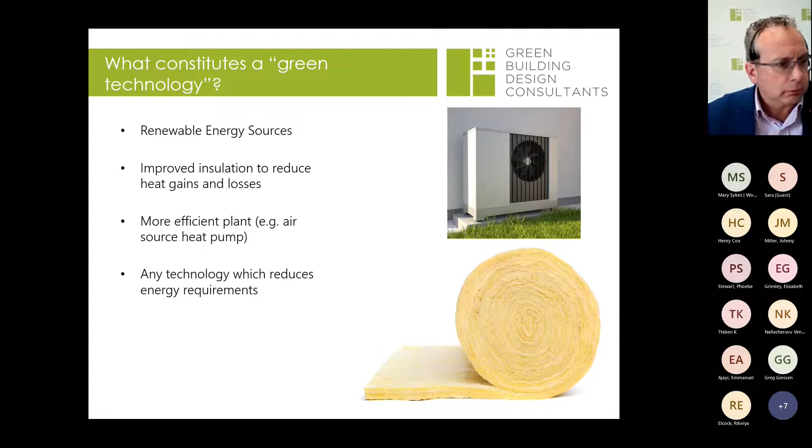Sorry, I'm having a bit of a problem with the slides here today. I don't know what's going on. Right, here we are. Sorry about that.

So that's really where the efficiencies lie, in the technology of the machines. Now, in terms of their level of efficiency, it is often referred to as a COP. Now, that is defined as a coefficient of performance. And that really is the manufacturers giving you, during an exact set of conditions, an exact external temperature and an exact internal temperature, how efficiently the machine can produce that.

And you'll typically see that as a number anywhere between 2.5 and about 6 on a specific set of conditions, which obviously isn't that helpful when you're trying to select a machine, because every day there's a different temperature, during the day there are different temperatures, and you may want different temperatures internally. So what the manufacturers try to do is take an average over the whole year, and they call that the SCOP, the seasonal coefficient of performance.

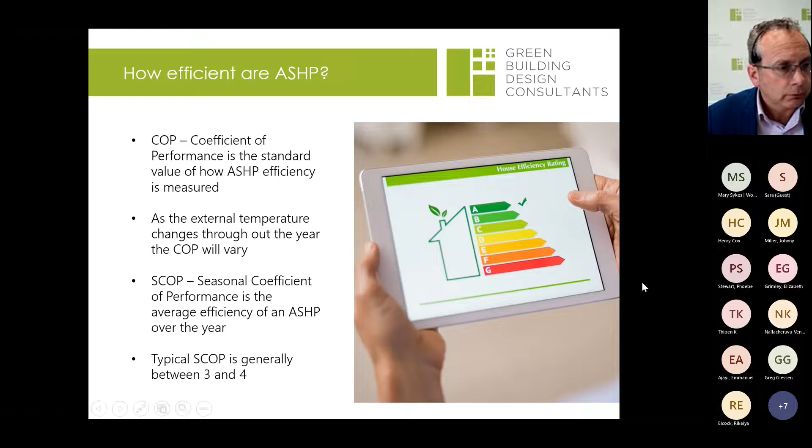Controls is one of the biggest ones that we could look to do. And obviously changing all of our lights to LED lamps. LED lamps use a fraction of the energy of GLS tungsten lamps, can be down as low as 10%, and probably about 30% of fluorescent lamps. Controls that automatically switch off the heating, lighting, and other services. Obviously, insulation we talked about is clearly going to save energy.

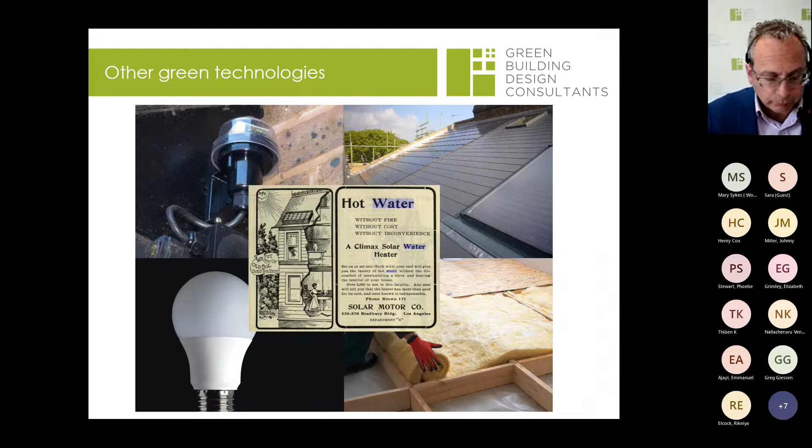Now, obviously, when we talk about green energy, we tend to think this is a new development and has not been around for very long. But there's a couple of slides there. Look, the one in the middle, from 1902, was a primitive solar water heating system, which comprised a cast iron tank and a wooden box, which gave you a free tank of hot water each day, demonstrating that this has been around for over a century. And in fact, the first solar powered station was built in Egypt by the British in 1912, and that was providing electricity to pump water from the Nile into local cotton fields.

So, challenges with green. This is always the problem. Probably one of the biggest challenges we have is the upfront costs. Going green is going to cost you more than staying with your boiler. Now, the costs for using green technology, if it's properly designed and properly laid out, will provide paybacks. Some of those systems can give you a payback in 18 months, and some of them can extend towards 20 years. But I will tell you now, the one thing that doesn't really pay back is an air source heat pump compared to gas boilers.

Now, you can get various grants from the government, and you can look at those, and those will obviously assist and help on those paybacks. But if you have a salesman telling you that he can put an air source heat pump in, take the gas boiler out, and pay it back in a couple of years, he's probably stretching the truth a little bit. And basically, air source heat pumps are going to be the preferred choice of the government. There will be some grants around for it.

And the days of having cheap gas heating, I'm afraid, for most of us are unfortunately going to be disappearing, a memory of how it didn't used to cost much to heat our houses, and now it does cost more, and it costs more to put that equipment in. And that's the reality.

The other constraint we need to think about with air source heat pumps is the size of the plant. We need a large unit outside, and we also need a unit inside, and potentially we need some air handling plant to control the amount of fresh air coming in. So the space that the plant needs is much more than we've been used to.

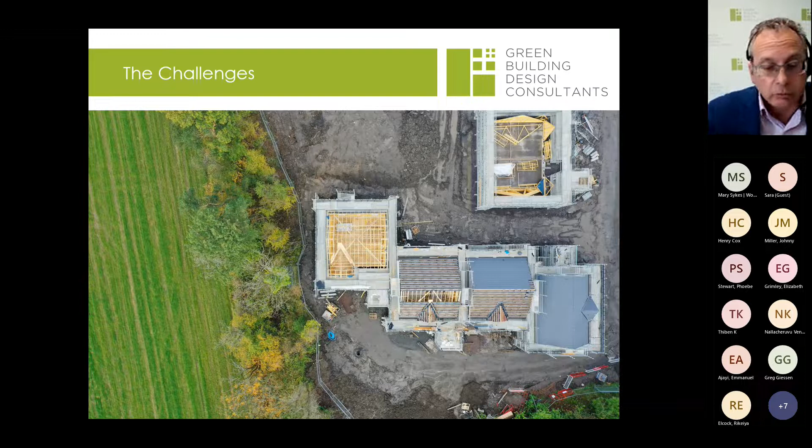Retrofitting these into existing houses does have some challenges, mainly because boilers work at higher temperatures than the air source heat pumps. That does become a challenge and needs to be properly designed. The biggest challenge when you have an air source heat pump, I think, or a ground source heat pump, is when people talk about the costs.

Now, we have already talked about the SCOP, which is your seasonal coefficient of performance for heating. There is another term that gets used, and that's the SEER. I don't know why we keep having all these names, but engineers are good at that. And that stands for the seasonal energy efficiency ratio. And that's the term used for cooling. So if you're going to cool your house, you'd look for your COP or SCOP for winter, and then you look for your SEER for how it can cool your house or your office in the summer.

Now, let's take the cost of electrical energy. It's very topical at the moment. Compare that to the cost of gas. With them constantly changing and fluctuating, it's difficult, and you have to draw a line in the sand at a date and look at that number. But typically, electrical energy is about 2.5 to 3 times more expensive compared to gas. So what that really means is you must select a machine that has at least a COP of 3 to 1, because if it doesn't, it could be costing you more to run than a gas boiler. And all the time it's running above that COP, it's saving you money towards the capital cost.

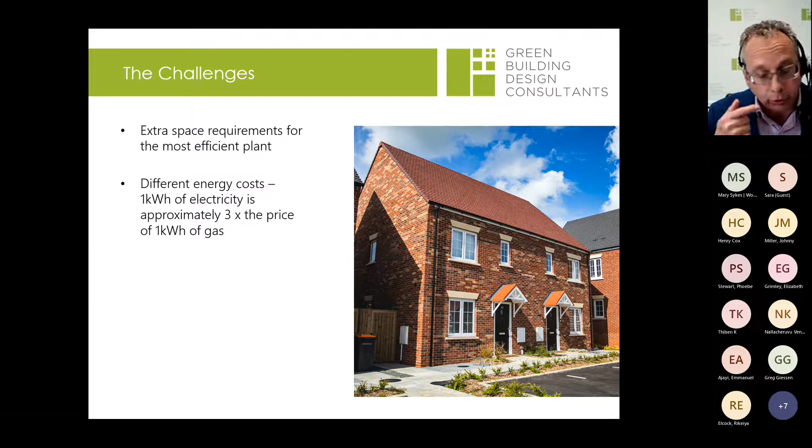So if we take an average machine with a COP of 3.9, that means for every 1 kilowatt of electrical energy in, you're going to get 3.9 kilowatts of heating or cooling into your space. Then compare that to how a typical air source heat pump would have an SEER, the cooling ability, of sometimes between 7 and 10 to 1. So again, that's amazing. 1 kilowatt of electrical energy in, and you're getting 10 kilowatts of cooling to your space. So back to heating.

The COP is for a specific temperature outside against a specific internal temperature. When coming into cold weather outside, they're obviously not quite as efficient. I guess that makes perfectly good sense. When it's really cold outside and you're trying to extract latent heat from the air, it's more difficult than if it's at 25 degrees. So manufacturers such as Mitsubishi quote that at -7 outside, the COP is about 3 to 1. So depending on exactly what you are paying for gas and electricity, it might at that specific moment cost you more to run than a gas boiler.

At -3, it jumps up to 3.4. At +1, it's about 3.9. And at about 25, so in the summer when you've only got hot water loads, manufacturers seem to be suggesting it's about 5. So if you use a lot of hot water in the summer, then you are going to save a lot of money compared to your gas boiler and help start to repay that extra cost.

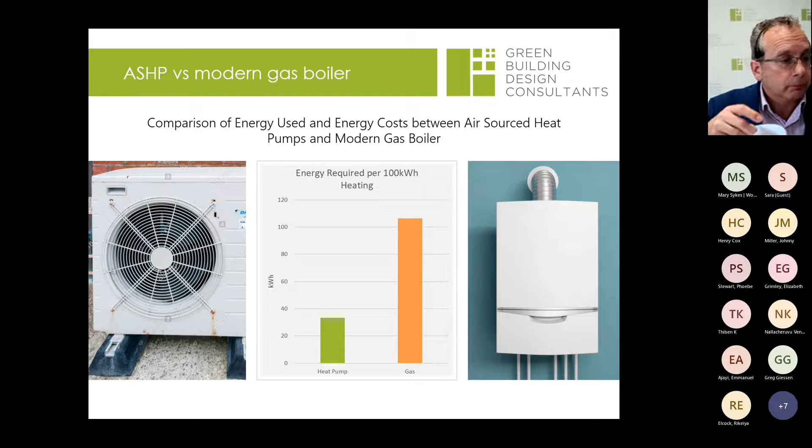So if I take Green Building Design's offices as of the 1st of April, we are unfortunately having to pay 28.4p for a kilowatt hour of electricity against 8.8p for a kilowatt hour of gas. So this second graph now on the right hand side is now showing how that can work on costs. Now, running through the maths,

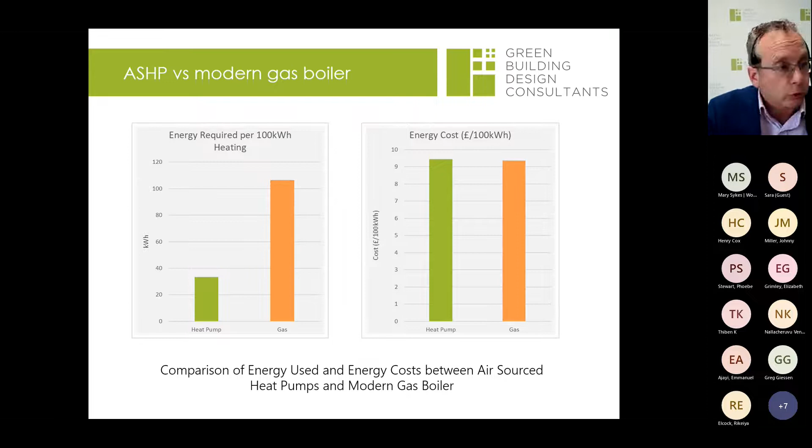if we assume that the COP of the machine was 3.1 in the winter, and therefore for every kilowatt of electrical energy in, you're getting 3.1 kilowatts to your space, so you're getting good efficiencies. Times that then by 100 kilowatt hours, that's coming out at £9.46. Then if you compare that to a typical gas boiler with a 94% efficiency, it's coming out at £9.36. So that's actually 10p cheaper to run those 100 kilowatts in that condition of internal temperature against external temperature, which clearly is quite a shock to some people, including engineers.

Now, having highlighted that maybe the air source heat pump isn't as grand and grandiose as I'm saying it is, clearly it's going to save an awful lot of carbon. It's going to save at least a third of carbon, and it may be down to 20% in the summer. So from that point of view, from carbon, there is great savings. What can we do to make the air source heat pump work better?

So in a domestic house, we've got to look at the thermal insulation. And if it's a new house, then clearly it can be built very well. And if it's an existing house, we can look to add insulation internally, change the windows to double glazed, stop air infiltration leaking in through drafty doors and windows, and add insulation obviously to the roof.

We could also look at your hot water demand. Now, hot water on air source heat pumps takes a while to heat up. It uses air source, it uses latent heat, and it will need to typically charge into a hot water tank. So we need to be really careful how we size that tank, because what we really need to ensure is that in the afternoon the hot water is charged up using the air source heat pump, hopefully in the south or west facades where you're getting solar radiation and the warmest weather. And then that tank then supplies your water load all day.

So we really need to start very carefully matching and make sure you're putting in low water use showers, typically what you'd get in a Premier Inn, which gives you a nice hot pressurized shower. And things like rainwater showers, which are very pleasant and nice, you have to understand they use an awful lot of hot water. Now, if the system hasn't been designed for that, then the chances are you're going to drain that tank of hot water down.

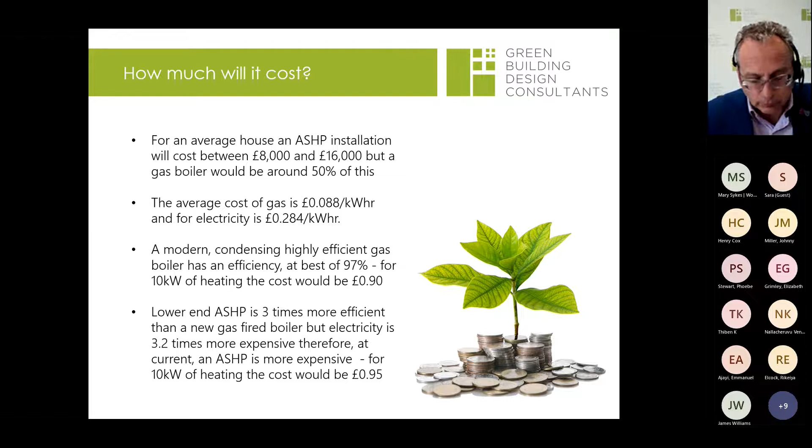So I wanted just to bring this slide in as it's much more topical, not knowing exactly who's in the audience, but just think about the costs. I'm asked all the time, okay, I haven't got 15 grand to put an air source heat pump in, but what can I do to save energy? And then when you have a chat to people, they do silly things.

In my house, I'm constantly having a row with my wife, because if we have a cup of tea, she'll fill the kettle up to the top, heat the whole kettle of water up, pour out 1 or 2 cups, and a couple of hours later get another cup of tea and fill it up again. Now, it's difficult to know as there are millions of kettles on the market, but looking at the kettle in our office and measuring the time it takes to take tap water up to boil, we've estimated that costs 10p at current rates in our office at 28.4p a kilowatt hour.

Now, that may not sound like much to you, but how many cups of tea a day do you have at home when you're working at home now? 10, a pound a day, times 365. So you could easily be spending £300 to £400 a year on boiling kettles of water for cups of tea. Now, if that was 25% full for your 2 cups of hot water, it drops down to 25% of the costs. So potentially, by only filling the kettle proportionally to what you want, you could save £250 a year in that scenario.

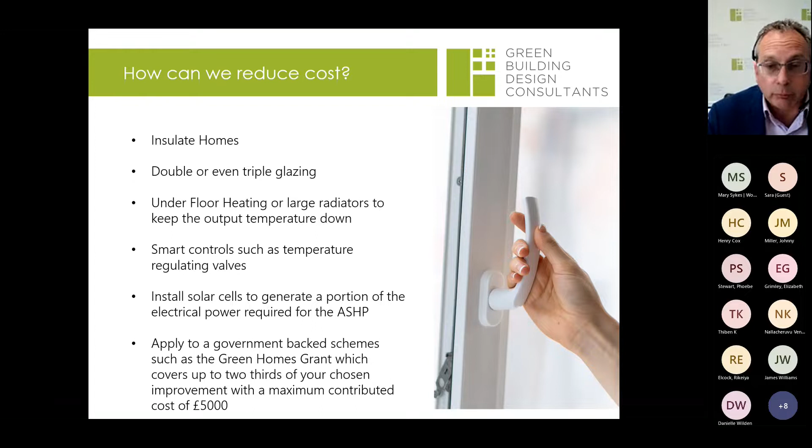So PV, in my opinion, every house in this country should have PV on it if you've got a south or west facing roof that is not shaded by trees or other buildings.

What we've done here is we've done a little model of an office block, and this office block is going to be air conditioned. So the benefit of this model is obviously the air conditioning runs typically in the afternoon when it's hottest, and obviously your PV will be working at its maximum input load from the sun in those south and west facades where the sun is in that area.

So all of the PV you're generating typically is then going to serve your air source heat pumps or your cooling systems. So you're getting the full value of the charge out rates, and you're not exporting to the grid, which obviously doesn't make a great deal of money.

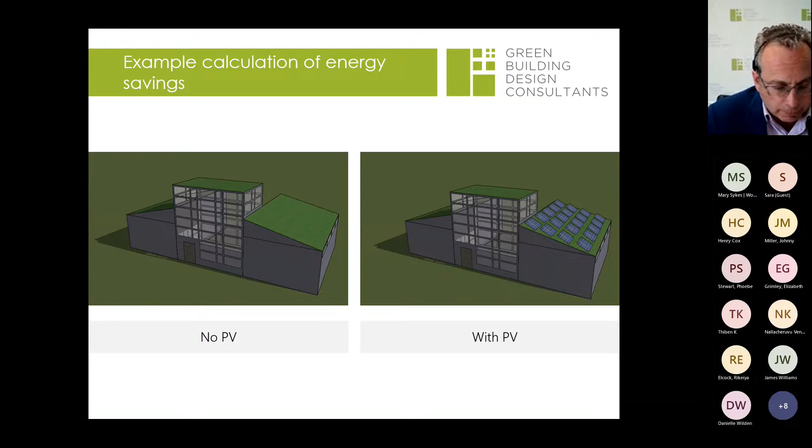Then if you have PV on your roof at home in your house with your air source heat pump, it's absolutely essential. You try to put the air source heat pump in the south and the west facades, and the controls are set by the plumber who will tell you he knows what he's talking about, and he's been doing it for years with a gas boiler and setting it to the night time.

And I see many houses where the air source heat pump time clock brings the hot water on at 3 o'clock in the morning. At 3 o'clock in the morning, there isn't much sun around, so your PV is not working, and the air temperature is probably the coldest. Your air temperature is the hottest in the afternoon, and if you have your air source heat pump in that southwest facade, it will also be picking up any solar energy and radiation that's around.

Therefore, you can try to get your air source heat pump, one, running efficiently, and two, using the PV almost free of charge. And that should be what we're trying to do as a goal. And if you can do that, you will start seeing some fairly major savings on running your air source heat pump compared to other people that don't experience the same.

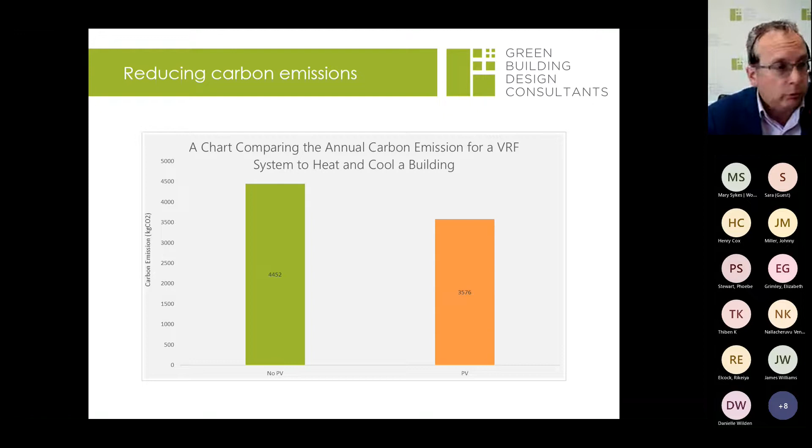So the future. The current plan for this country is that electrical energy was considered quite a polluting or high carbon emission type product to use. Therefore, it carries embedded and hidden carbon taxes. So the government put carbon taxes on using electricity, and at the same token, it encourages us to use it.

So I think as the electrical grid becomes greener, there's going to be a lot of pressure on the government to remove that tariff from electrical energy, which it encourages us to use, and put it on oil and put it on gas. And I see fairly soon a time where electrical energy will suddenly become cheaper at the same time that gas energy starts to really come up. And that will obviously help on all of the variants, help on the efficiencies, and will make air source heat pumps more attractive.

Government has got to discourage us from using gas, because gas is just too cheap and too easy. And therefore, I can only see that happening with lots of sticks and carbon taxes. Air source heat pumps are continually being improved, and I think their efficiencies will drive up, which will obviously make them cheaper to use. You need to also remember that from 2025, no new buildings will be allowed to have gas-fired boilers in them anyway. So we are going to have to get used to this way of working.